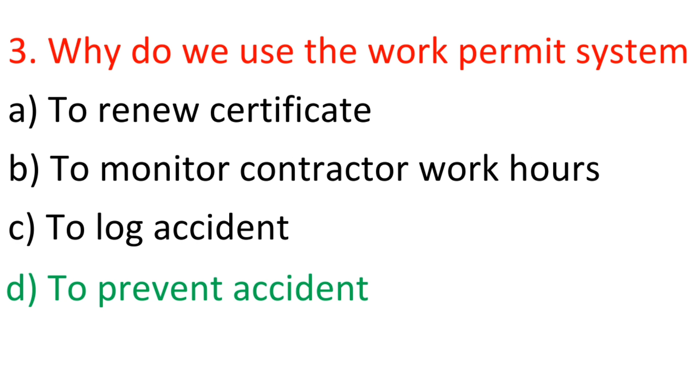Question 4. Work permit must be issued for: A. Specific work at specific location. B. Specific tools and general location. C. General work at general location. D. General equipment at small work sites. Answer: A. Specific work at specific location.

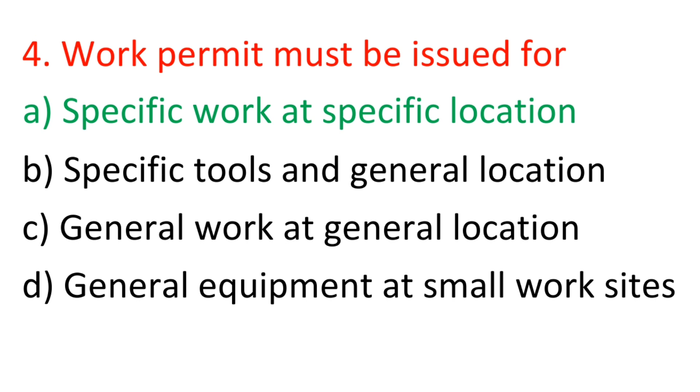Question 5. Why are welding, cutting and brazing tasks in confined spaces dangerous? A. They increase the risk of CO2 exposure. B. Flammable atmospheres and combustible material can ignite. C. They increase the risk of high oxygen levels. D. All the answers. Answer: D. All the answers.

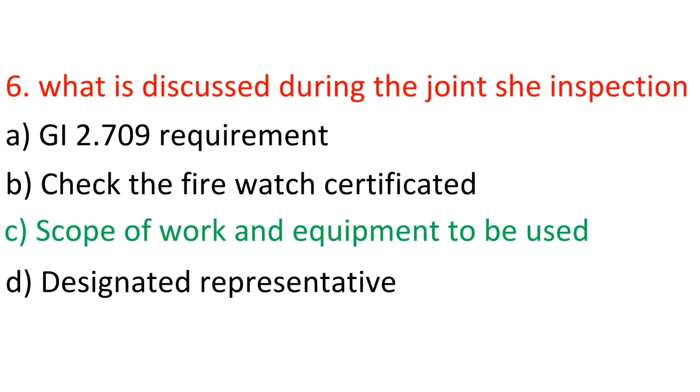Question 6. What is discussed during the joint SHE inspection? A. GI 2.709 requirement. B. Check the fire watch certificate. C. Scope of work and equipment to be used. D. Designated representative. Answer: C. Scope of work and equipment to be used.

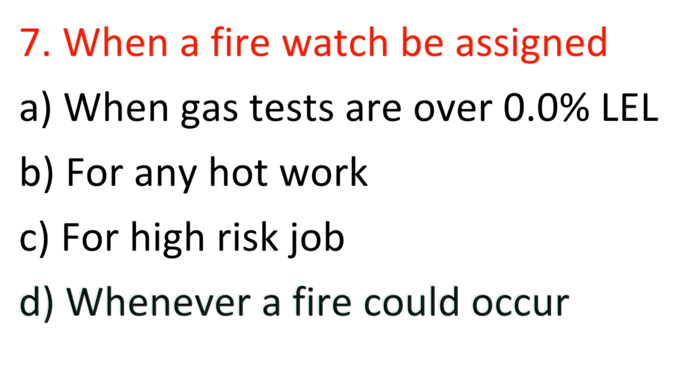Question 7. When should a fire watch be assigned? A. When gas tests are over 0.0% LEL. B. For any hot work. C. For high-risk jobs. D. Whenever a fire could occur. Answer: D. Whenever a fire could occur.

Question 8. Why must the equipment be de-energized and depressurized before work is started? A. Electricity can be wasted. B. People can be injured. C. Locks and tags will be lost. D. Gas can be wasted. Answer: B. People can be injured.

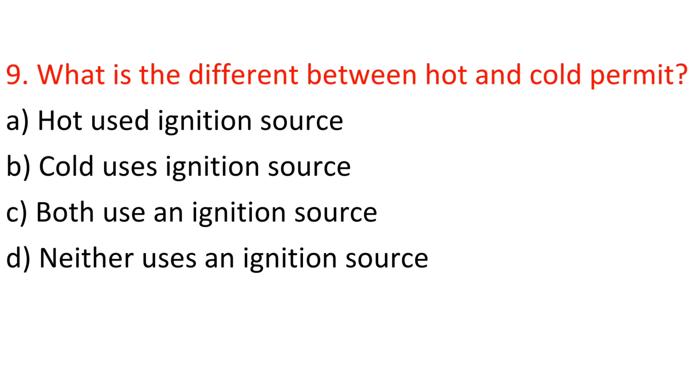Question 9. What is the difference between hot and cold permit? A. Hot uses an ignition source. B. Cold uses an ignition source. C. Both use an ignition source. D. Neither uses an ignition source. Answer: A. Hot uses an ignition source.

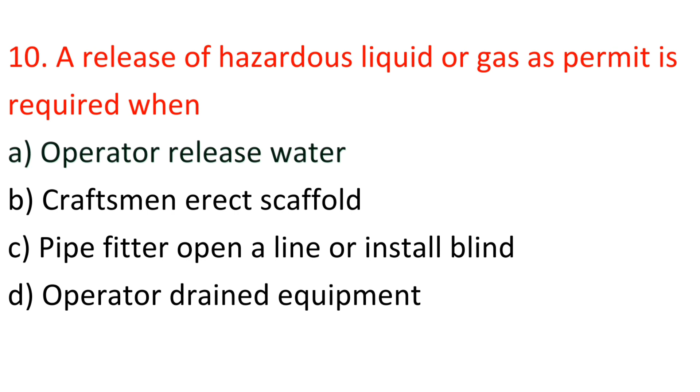Question 10. A release of hazardous liquid or gas permit is required when: A. Operator releases water. B. Craftsman erects scaffold. C. Pipe fitter opens a line or installs blind. D. Operator drains equipment. Answer: C. Pipe fitter opens a line or installs blind.

Question 11. You should check before issuing a release permit: A. Safety harness, belt and safety glasses. B. Wind direction, drainage and ignition source. C. Sewers, manway and air mover. D. Ignition source, gloves and safety shoes. Answer: B. Wind direction, drainage and ignition source.

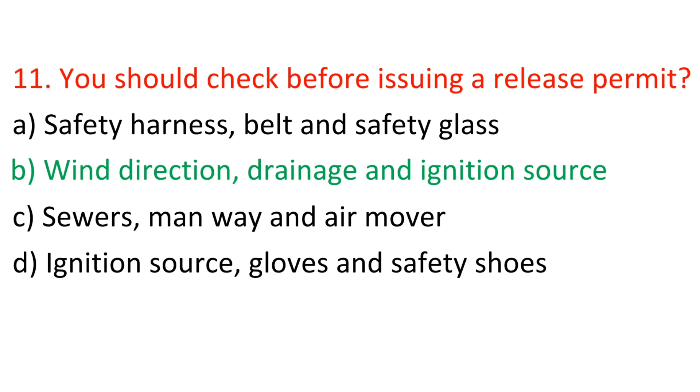Question 12. Work permit can be issued up to: A. 2 receiver shifts. B. 1 operational shift. C. 24 consecutive hours. D. 10 hour shifts. Answer: B. 1 operational shift.

Question 13. What might happen if a safety problem arises and the receiver does not stop work? A. Counter signature becomes void. B. His certificate expires. C. The work permit expires. D. A fire, injury or accident. Answer: D. A fire, injury or accident.

Question 14. An excavated trench deeper than what is considered a confined space? A. 1 meter. B. 4 feet. C. 1.8 meter. D. 3 feet. Answer: B. 4 feet.

Question 15. Welding inside a storage tank, what type of permit is required? A. CSE and HWP. B. HWP and CWP. C. CSE and CWP. D. EOLB and CSE. Answer: A. CSE and HWP.

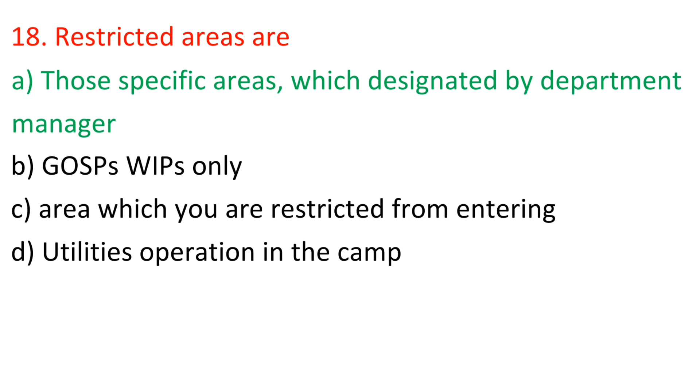Question 19. The work permit receiver must be certified by: A. Loss prevention. B. Passing the work permit test. C. Division or department head. D. Operations foreman. Answer: B. Passing the work permit test.

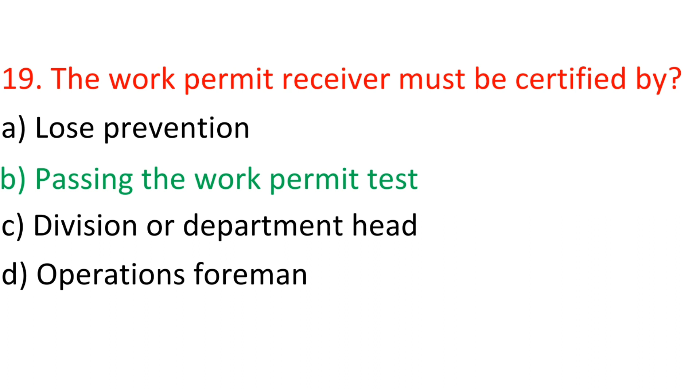Question 20. For the use of a radioactive source only in a restricted area you would issue: A. Cold work permit. B. Release work permit. C. Hot work permit. D. None, as long as the area is barricaded securely. Answer: C. Hot work permit.

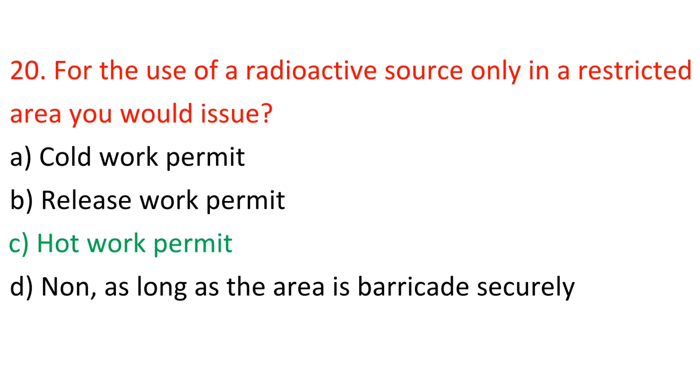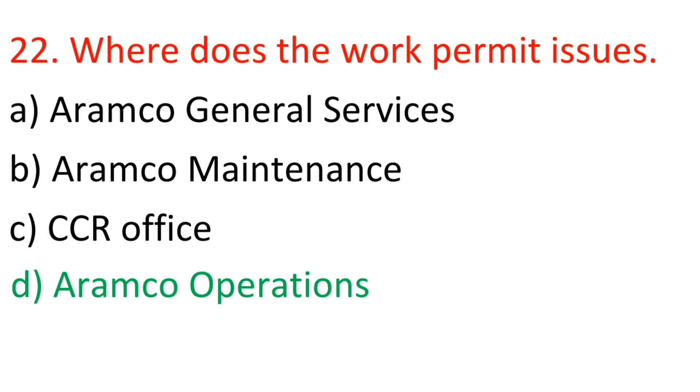Question 22. Who issues the work permit? A. Aramco General Services. B. Aramco Maintenance. C. CCR Office. D. Aramco Operations. Answer: D. Aramco Operations.